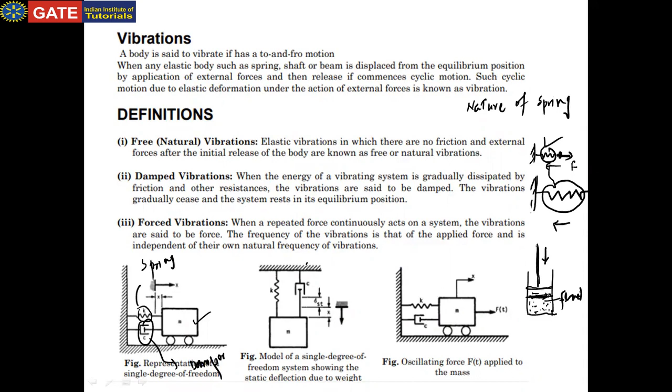Here they may have a very high viscous fluid. Suppose force is going in this direction. So this rod will go inside. It will get this shape here. So this fluid will try to oppose it, but it is a smooth force, because hydraulic fluid will be there and the hydraulic action will be very smooth. So once load is acting in the downward direction, this rod will try to go inside, but that time the fluid will try to oppose it very smoothly.

So we just think of this example. Suppose you applied load here. This is the wheel. So this block will go in this direction. But suppose the damper is not there. If you leave it, then this spring will try to restore, means it will try to go in this direction. But it will go very fast. It will give a jerk. The damper will try to oppose the motion. So smoothly it will go back.

Tell me dear, are you guys getting the concept or not? Say yes or no. Yes, sir. So the damper will have a resistance to the motion.

I mean, see, suppose we don't have a damper. This is the block and wheel we have. Wheel means frictionless, okay? If you apply load this way, this trolley will go in the forward direction. But if you remove the load, then because of the restoring force stored in the spring, this restoring force will try to get this trolley back as soon as possible.

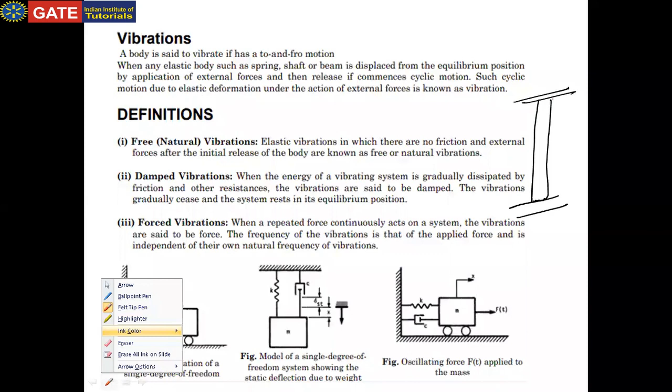Understood? Okay. See, in your bike, you have seen both sides below the seat. You have seen this rod, and over the rod, you may have a spring also. So basically, spring and damper both. In bike we call this a shocker. Shocker means to absorb the shock.

So if you check the shocker, a part of this spring mechanism will have this damper mechanism also. Sometimes if you go to bike mechanics, they may remove this shocker and fill the fluid again, so that the damper will work nicely. So in your bike you have a good shock absorber because of both mechanisms, spring and damper.

So that damper I told you, in your bike, will be like this. There will be a small kind of pipe inside that rod, and fluid will be there. So the bike mechanic will remove the shocker and fill the fluid again, maybe mobil oil, a high viscosity fluid. Yes or no? Yes, sir. All right. So it is very clear now.

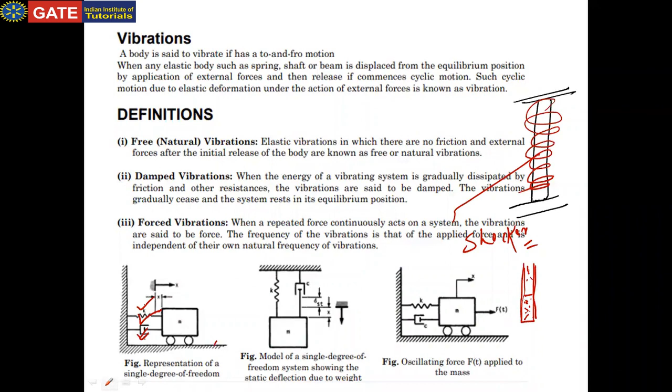Okay. So here this is K. Suppose this is the spring and this is K. This K is nothing but the spring coefficient. And we'll have a damper. This is the damper. This damper is called C, which is called the damping coefficient. Remember. All right, done.

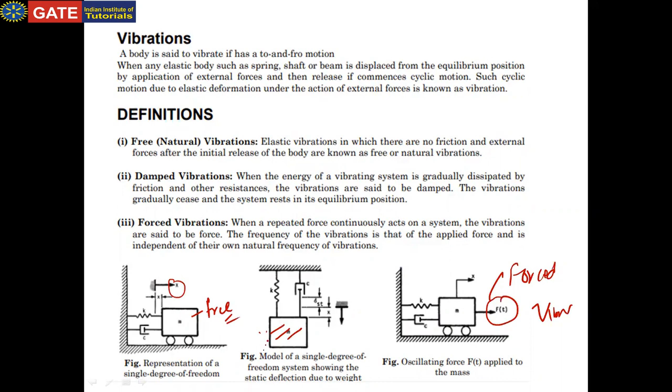Now see. Here we have a continuous force, so this is forced vibration. Here we are applying the load, but after the force there will be motion x, and then you remove the force. So this is free vibration. And here, because of the self weight, we'll have a deflection. So self weight deflection is also a kind of forced vibration. So all three we have.

Now check a very simple term, time period. This is 12th standard only. What is the frequency f, and what is the time period T? Time period T is 2 pi by w. What is w? W is nothing but angular velocity, radian per second. So Tp is equal to 2 pi by w, or f is equal to w by 2 pi.

These are the basic formulas. Time period T is equal to 2 pi by w, and frequency f is equal to 1 by time period, so again w by 2 pi, or you can write w is equal to 2 pi f. The meaning is the same. This very basic you should know.

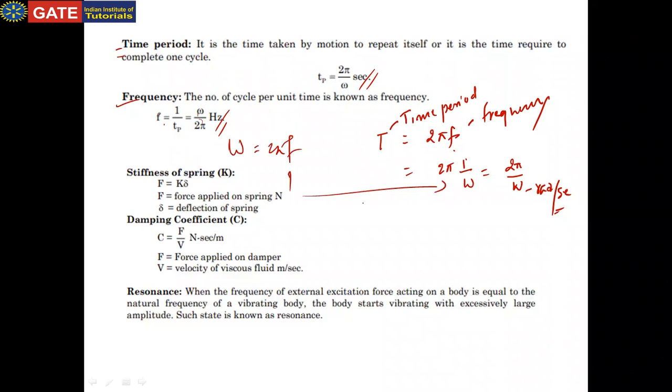Now I will explain this f. Suppose this is the spring mechanism. This is the mass M, and this is the spring K. So obviously we'll have a deflection in the downward direction. This is also called delta. Now another diagram I will draw. Here we'll get the deflection.

So we'll have a restoring force in the upward direction. What will be the restoring force? K into deflection x. X is the deflection. You remember F is equal to K delta. X is nothing but delta. It's your choice, you can show deflection as delta or x, the meaning is the same.

Similarly, damping coefficient. Like F is equal to K into delta for the spring, for the damper F is equal to C into V. C is the damping coefficient, and V is the velocity of the fluid. F is the damping force, or force applied on the damper.

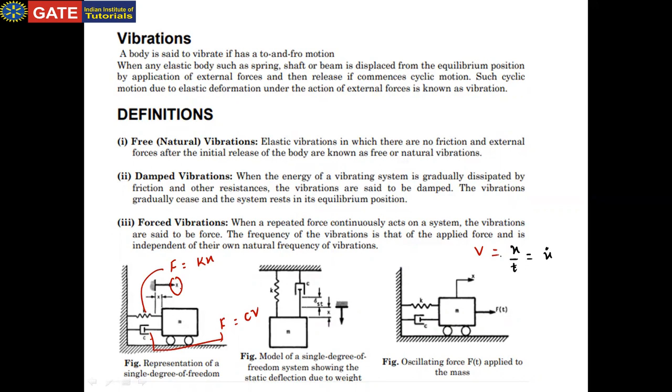What is the velocity? It is distance by time. What is the distance? It is x. So we can write x by t. Can I write x by t? Yes, sir. Can I write x by t as a velocity? Yes. Distance by time. What is the distance? X. X by t, can I write x dot? Yes, sir. Dot means per unit time or divided by time.

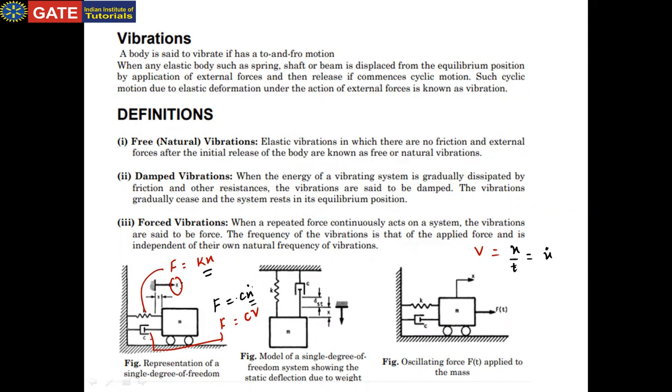So that damping force you can write F is equal to C into x dot. What is the F? Kx for the spring, F is equal to Cx dot for the damper. Is that clear? Yes, sir. Okay. Now next word is resonance. It is very nice word. What is the meaning of resonance? You know, in 12th standard physics you had seen.

No? Suppose I was just thinking this way. Like, anyway. Okay, this is the river. This is the river. River. Okay. All right. Now over the river, this is the road. So obviously this is the river and this is the road. Okay. So what you may have? You may have a bridge. Yes or no? Let's say this is what? Bridge. Clear?

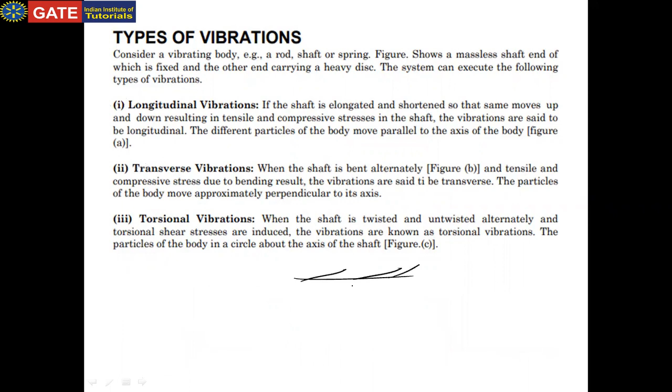What is the torsional? Torsional is always because of the twisting. I mean, this is the case. We have a disc like this. Okay. In our childhood we had small key toys. If you rotate that key, and then if you leave that toy, then that toy automatically will go in forward direction. Yes or no? We'll have a key here. Yes, sir. If you rotate this key and leave it, then this toy will move in forward direction.

So that twisting, whatever you are giving, because of the twisting condition, twisted and untwisted, it is given automatically. It will give the torsional vibration. I hope you understood all three types. Tell me, dear. Yes, sir. Yes, sir. Right. So why I'm telling this, because it is very basic. I know you guys have seen

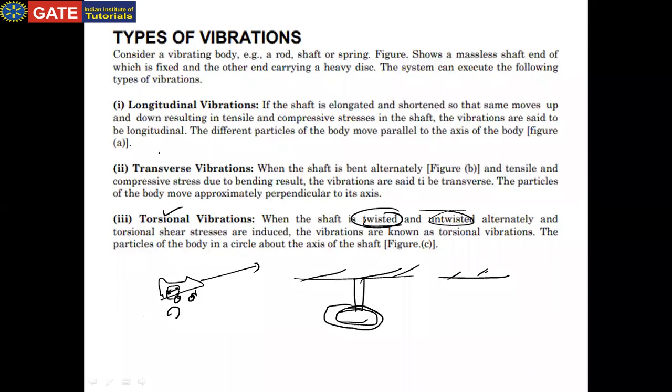Sir, your voice is breaking. Okay. So now it is fine. Now it's fine. Yes, sir. Yes, sir.

Yeah. So I told you that weightage of this vibration is 2 marks or 4 marks. This is max and this is min. So for the 2 marks, you don't go for the one subject. Mechanical vibration is a complete subject in your semester in mechanical engineering. So I will suggest don't go thoroughly. Whatever important I'm telling you, go through that only. That is more than enough, and with the help of that, all questions you can solve. No issue. Very basic questions they are asking.

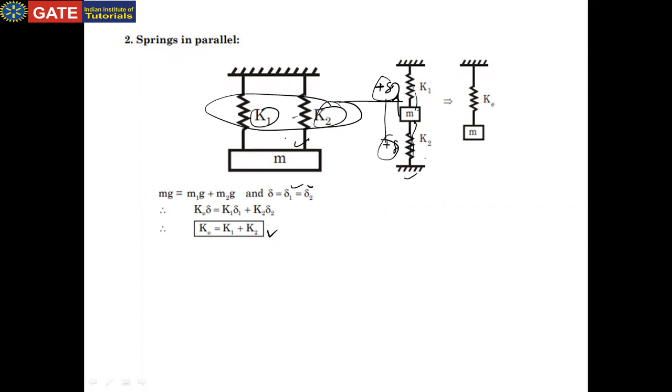Magnitude will be same. Now the thing is, in another way also you can understand, like the same mass. As you said, if one side will go this side, what is the deflection you may get? It will be positive, or suppose negative compression, but at the same time we will have a tensile here, plus it will elongate and it will compress, but that amount must be same. And here also deformation you are getting same.

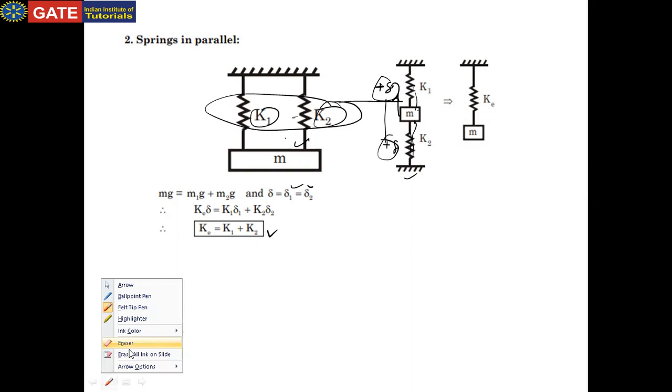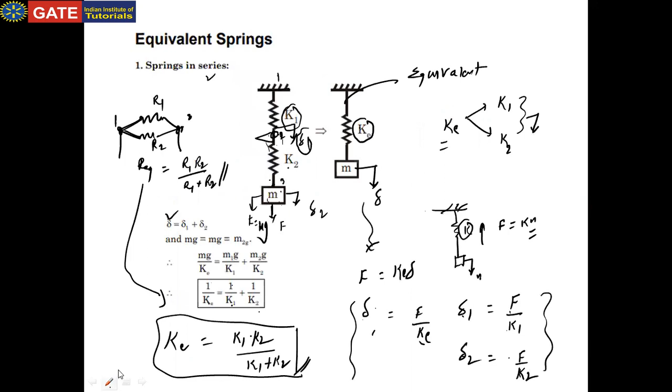Check, so it means this and this, the overall will be same. So the same parallel connection, sometimes you may get this connection like this, or directly you may get this. Don't think this is series, because this diagram and this diagram seem very common. So don't get confused there.

Or else I will tell you another example to understand this. Simple, this is the mass. You hold this mass and stretch this mass. If you hold this mass and stretch, then how it will look like? It will look like this.

Yes or no? If you hold this mass and stretch in this direction, then this mass will look like this or not? Tell me. Yes, sir. So this diagram is nothing but this. Yes, sir. Ah, then this way also you can understand. There should not be any confusion.

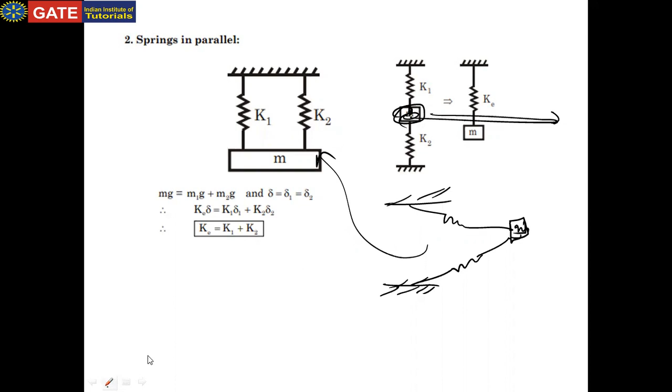Yes or no? If it is parallel, then it will be added, just like series resistance. You might remember from 12th standard physics - this is series resistance, R1, R2. So if I ask what is the equivalent, you would say R equivalent equals R1 plus R2, because current will be the same, hence it adds up. So series resistance result will be equal to parallel springs connection. Done? Yes sir, done.

So now we have the spring-mass mechanism. Please draw this diagram separately - this derivation is for this system. This is the one complete system: this is the spring and this is the mass. If you apply a load downwards, it will have a deformation X in the downward direction. Done? This is the diagram.

So if I ask what is the restoring force of the spring, you have to say F equals Kx. What is F? F is nothing but the force, and its unit is Newton. Newton is nothing but mg. So mg equals Kx. Hence K divided by M is equal to g divided by X. Understand?

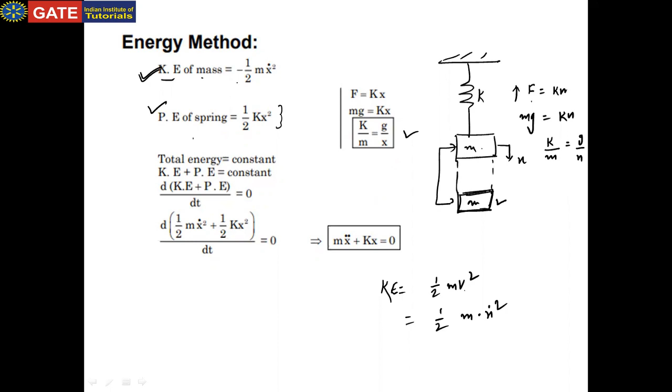This is kinetic. What is the total energy? Obviously it must be constant. This total energy is also called mechanical energy, and mechanical energy must be constant. So total energy will be the sum of both, for the system of mass and spring. For mass, it is kinetic energy; for spring, it is potential energy. Sum is equal to constant.

Any constant, differentiation will be zero - you know that, 12th standard mathematics. Any constant's differentiation will be zero. So you differentiate that energy and make it equal to zero. Kinetic energy: if you differentiate, 1 by 2, mass is constant, it is x dot. If you differentiate, then what you may get? I will write here 1 by 2 m - if you differentiate with respect to time, then you may have x double dot square. Agree?

Yes, sir. Okay, plus 1 by 2 k into x square. If you differentiate with respect to time - can you differentiate with respect to time? I think you just correct this.

This derivation - I was in a hurry and made a mistake. You can write it in this way, check, so it will be very clear. It will be 1 by 2 m, this is x dot square - already square is there. Now if you want to differentiate, then what you may get? 2 times x dot into x double dot. Agree with me? Yes, sir.

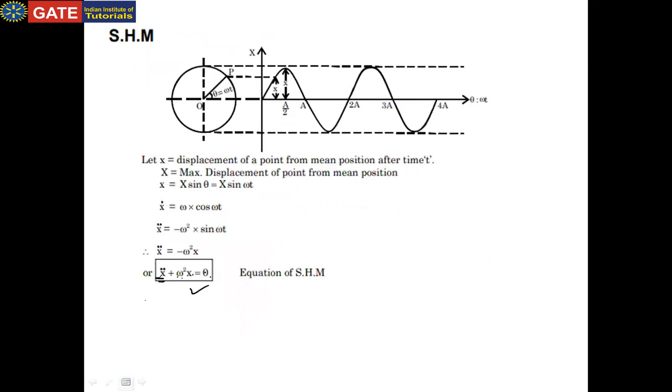X double dot plus w square x. Yes or no? Standard equation. Can you compare with the standard equation? If you want to compare with this standard equation, then you have to write this in this format. So I will write this: x double dot plus k by m into x is equal to 0. Now it is the same one. Now omega square is equal to k by m, right. So you can compare this.

So, all right. You can write this. So w square is equal to k by m, or w is equal to root k by m. This is the natural frequency of the spring mass system. You might have seen w is equal to root k by m. So this is the frequency. Actually, this is the angular velocity. It depends. If it is given in radian per second, then it will be angular velocity.

Or if you write frequency, then f is equal to w by 2 pi, so it will be 1 upon 2 pi root of k by m. So this will be in hertz. This will be in radian per second. You understood? So for the spring mass system, the frequency in hertz is 1 by 2 pi root of k by m, and the angular velocity in radian per second is root k by m. Up to here it is clear? Yes, sir. Okay. So we'll continue this.

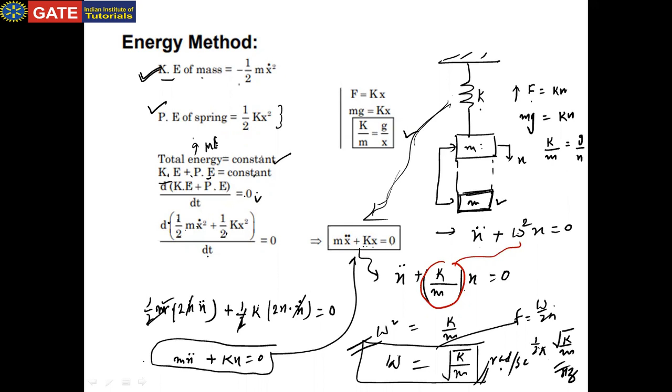It's okay because you have 65 questions. I have given the calculation many times, and for those watching the recorded video, I'm saying again, in total we have 65 questions for 100 marks in 180 minutes. I will suggest, if you get only 40 questions correct, you may still have more than 60 marks. And more than 60 marks means you are under 50 rank. Very simple.

So selection is done with only 40 questions correct. If you are doing that, your selection is already done. No doubt about it. If you have done 25 two-mark questions and the rest one-mark ones, then it is more than enough. So 40 to 45 questions out of 65 must be your minimum target. Just think, out of 65 you are going to hit 40 questions, so you have the option to skip 25 questions.

If you are planning 40 to 45 questions, you may also get more time margin. Because for 65 questions, if you go for 180 minutes, you may get maybe 3 minutes for one question, or less than 3 minutes, 2.71 something. But if you go for 40 questions only, you may get more than 4 minutes, 4.5 something. So that time margin also you may get.

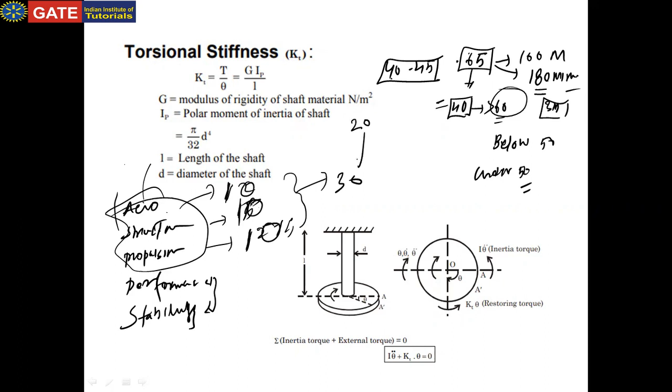Only three core subjects and math and aptitude, if you do them properly, you can get nearly 50, 60 marks very easily. Suppose, just for example, aero 10 marks, structure 10 marks, propulsion, meaning jet and rocket propulsion, 10. I'm sure propulsion is more than 10, structure is more than 10, aero also more than 10. But I'm considering at least 10, 10, 10, 30 marks. Math and aptitude, suppose you get 20 marks correctly. Total 50. 100% selection. 50 marks is more than enough.

So I'm not saying go and skip performance. Maybe someone has a choice to practice performance, so they take performance, propulsion and aero, and skip structure. I'm not saying you skip it, it's your choice. I'm just telling you how to set up the plan in your mind, how simple it is to get 50 marks. That is my intention. I'm not saying skip any subject or don't prepare. No, whatever you can prepare, please prepare.

Give your 100%. But I'm going to ease your mind. I'm not going to pressurize you or make you panic. I just want to tell you it is very simple. Don't panic. Don't take an overburden on your head. That's my intention. I'm just telling you how simply you can get 50 marks, and 50 marks means 100% selection. That is true. Any IIT you may get. You plan there. Okay.